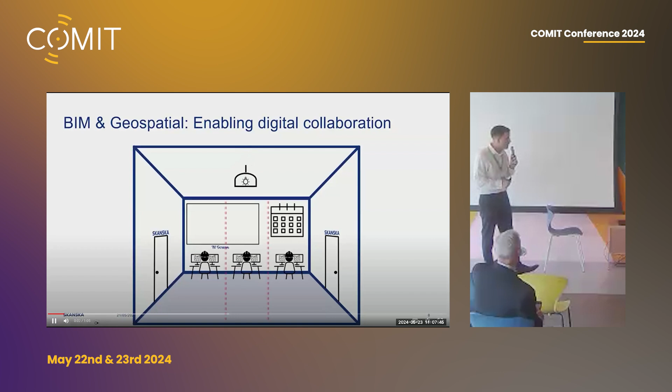Essentially, the main challenge, or the primary vision that we wanted to address, is how we are able to enable collaboration between all these different stakeholders, and how we are able to democratize, if you'd like, all the thousands or hundreds of thousands of data that are typically produced during the stages of design and construction.

And hopefully you can relate with some of the biggest challenges that I've identified here, which, of course, number one is interoperability, right? A lot of the times people are able to produce their own data, they're working in isolation, in siloed ways. A lot of the times now we're moving to common data environments, which is a great step towards this collaboration, but it can still be quite tricky and difficult to access data almost on demand from different construction sources.

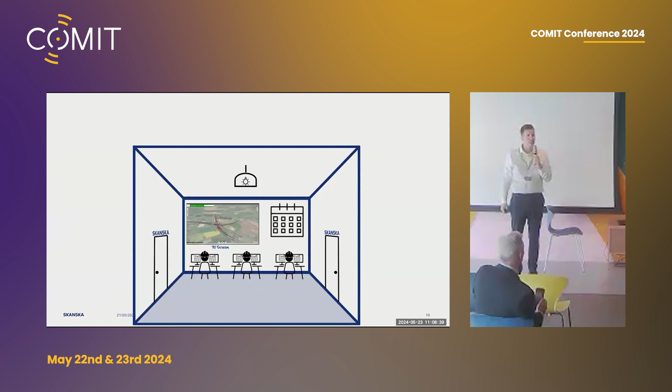And this is where the notion of BIM and GIS integration, GeoBIM if you'd like to call it, comes into play, because it acts as this federation, the digital foundation of the project, that allows you to bring all this data almost with a click of a button into a single view.

And from there, you start building capability. But in order to get to this point, you need to make sure that your data is coded properly, is standardized, and you have the right verification and assurance methods, because people start using this for information and for decision-making, rather than just visualization.

The project I'll be describing today is work we are doing on behalf of National Highways. RDP stands for Regional Delivery Partnership, A428. It is a 10-mile dual carriageway in the Cambridge area, and it is a project that is quite complicated when it comes to engineering works as well as stakeholder interfaces.

So the first use case is, I would like to share with you how we have been able to transition to a fully digital and data-driven way of managing permits and construction operations. I will focus on two particular examples: environmental and health and safety.

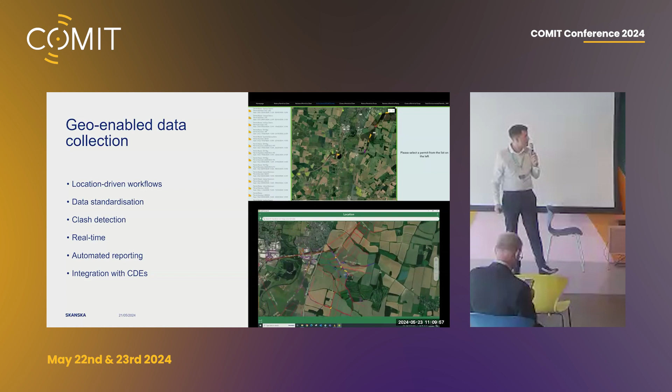On the top right window we see our environmental hub, and on the bottom right window we see our health and safety hub. What I'd like to highlight is the value add of creating this data and location data-driven workflow.

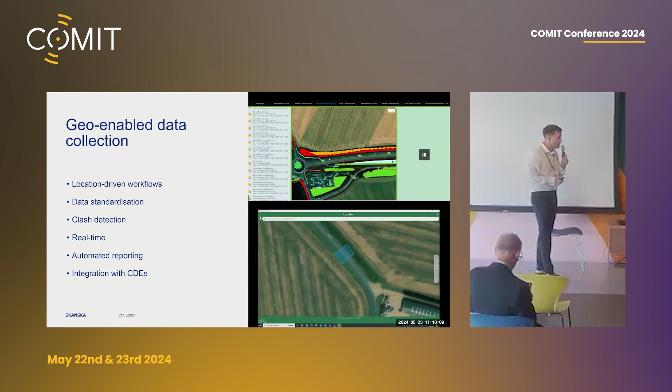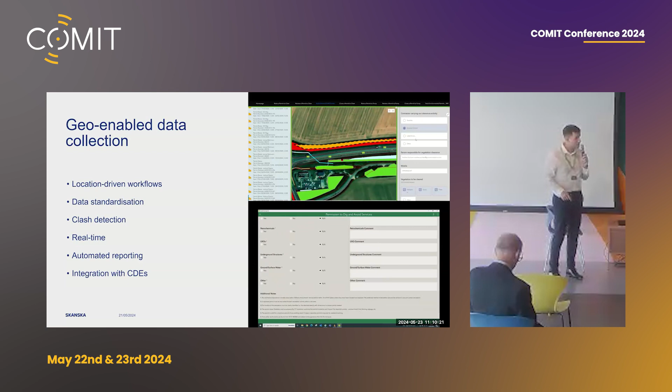What you're seeing in both examples is how we are able to consume design and construction data to ensure there are no environmental or health and safety incidents on site. The entire construction team has complete visibility of all the different environmental species, habitats, ecology surveys, and protected areas before they actually go on site to do site clearance, for example.

If they raise a permit and identify there is a spatial clash detected within this area, the system prohibits you from doing this and raises awareness that there needs to be an ecology mitigation process first, before you actually work on site.

It becomes even more important when we think about health and safety and the management of underground assets such as utilities. This greatly reduces the potential harm of striking an underground service, which is important first and foremost for the health and safety of the individual on site, but it can also lead to huge program delays during construction delivery.

Before we jump to the next slide, there are a lot of unique characteristics that underpin our solutions, but the one I'd like to focus on is the integration with common data environments, because it's very important to note that people are making decisions on this data, so we need to make sure we are constantly serving them with the right data.

The second use case is how we have been able to digitize a quality management system using building information modeling and geospatial. I'm sure everyone is familiar with this, but there is a process in construction called inspection and test planning.

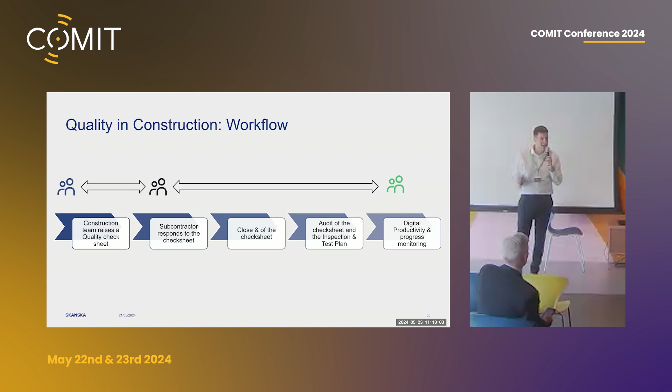It was actually a really big step to move from the traditional way of managing these check sheets into a digital way, and getting buy-in from the team was the most significant challenge. There were a lot of technical challenges too, which can always be resolved, but the buy-in, and making sure this is actually utilized on site was one of the key ones.

So for this reason, what we are building here is something developed through a lot of stakeholder engagement. It's not just a digital team sitting in their offices creating amazing digital tools and then going to the engineers saying 'use it,' because our experience has been that this will not work.

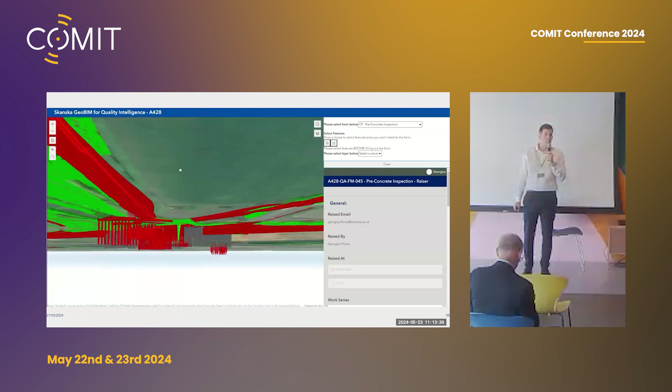So this was a multi-collaborative exercise. We brought the digital disciplines together. We brought our engineers, our client, our supply chain, to make sure that they are feeling comfortable and that the system is doing what they want it to do, rather than what we believe is the right thing to do. You're seeing here an example of moving into the 3D space.

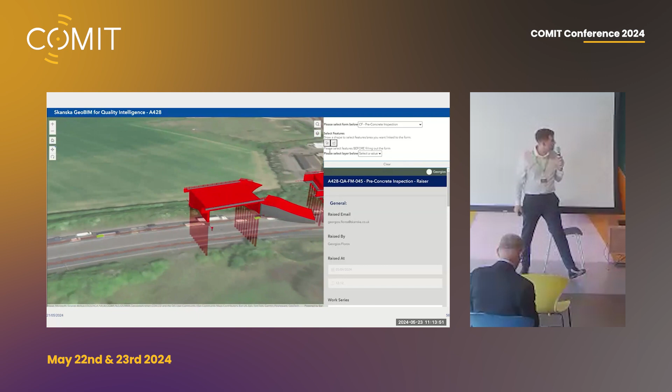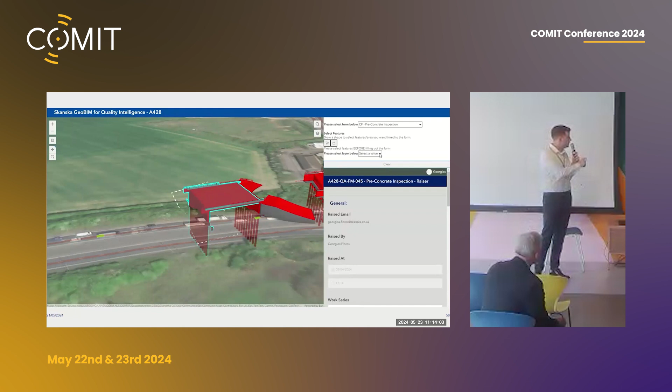What is this one? It's a pre-concrete inspection straight off the 3D model. So what you're seeing here is the engineer is able to designate the area they will be working on. As they do that, you can see all the different aspects of the 3D model being highlighted and selected, and then a drop-down list is being populated. It's a Uniclass code specification for people familiar with these data standards.

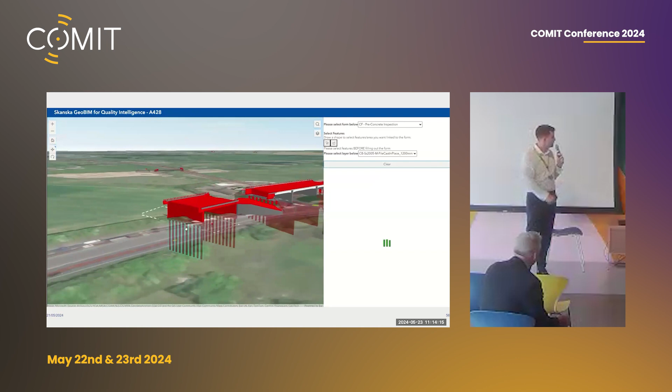We are isolating the piles, which prevents human error. But more importantly, it provides the digital connection, because you can see the asset ID here. This acts as the primary key between the check sheets, the form, and the 3D model, providing the permanent connection between what has been built versus what was planned to be built.

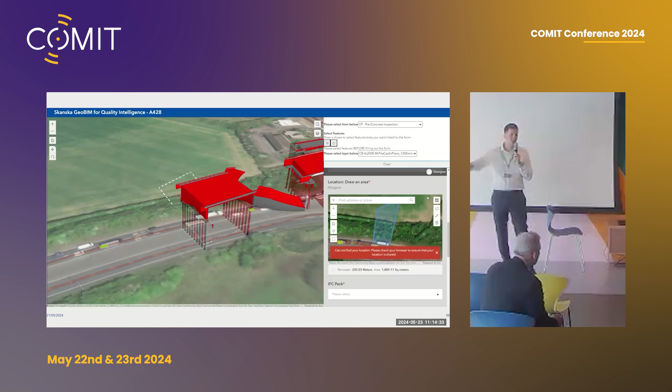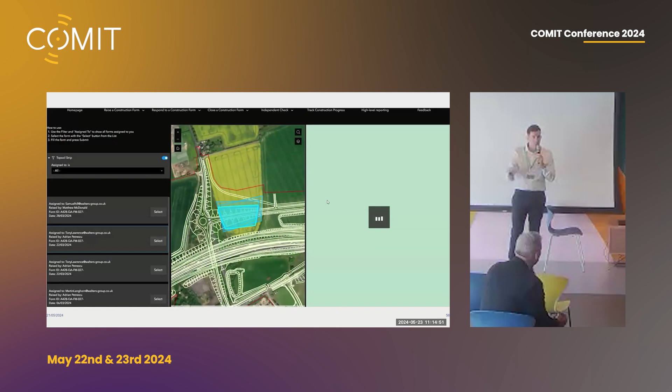This can be extremely useful for construction progress and productivity monitoring on site, but more importantly, the handover process becomes far smoother because this is all managed as a digital record. Through the right code and standardization, the health and safety file can be auto-generated within a few weeks.

What we are seeing here is the second step of the process: once a check sheet is raised, how the supply chain, the subcontractor, gets on board, responds, reviews the comments, and the workflow kicks on.

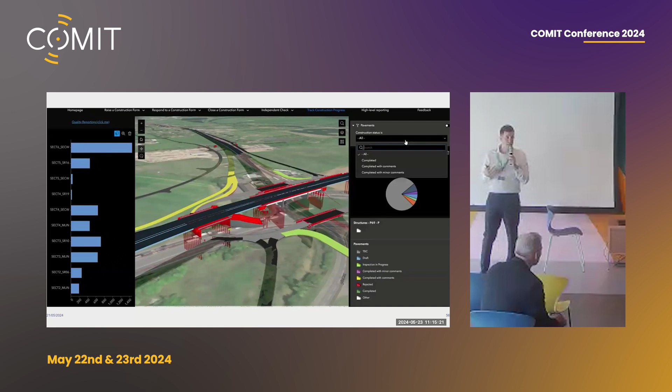And this is the example I was mentioning earlier. Once we start raising check sheets in a digital way, it becomes much easier for our construction managers and project managers on site, as well as our clients, to have confidence that we are building up to spec and according to program.

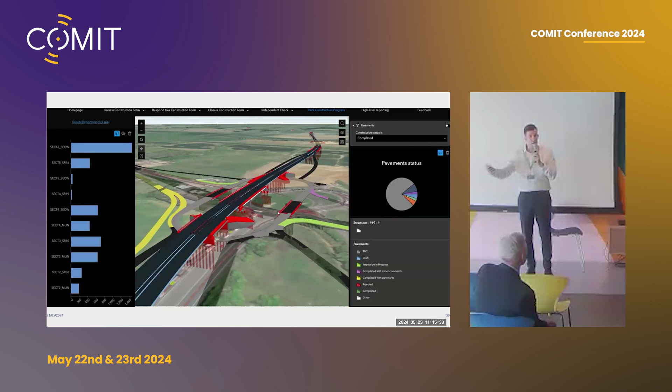So these were the two use cases. I would like to briefly summarize the outcomes we have experienced.

There are significant savings around time when we move to digital ways of working. We have been able to reduce the workflow, the process, the time needed to manage hundreds of thousands of permits, by up to 83%. This has given us a significant amount back in time savings.

The most important thing, or something we are looking at now, is how do you actually utilize this for further benefit of the project? Can it improve your engineering capability? Can it improve, or introduce new innovation that the client is able to get on board with? It's very important that we calculate and capitalize on this value add.

The customer experience has been quite key for us as well, because it's not just a solution or capability we're doing in isolation. We want the feedback, the input from the customer, and we want to make sure they're part of this journey. An exercise we recently did estimated that about 80% of the data they're using for asset management is deriving from the stages of design and construction.

Getting all this information in silos, in PDFs, in digitized but non-intelligent formats, means they're not getting the maximum value out of the data.